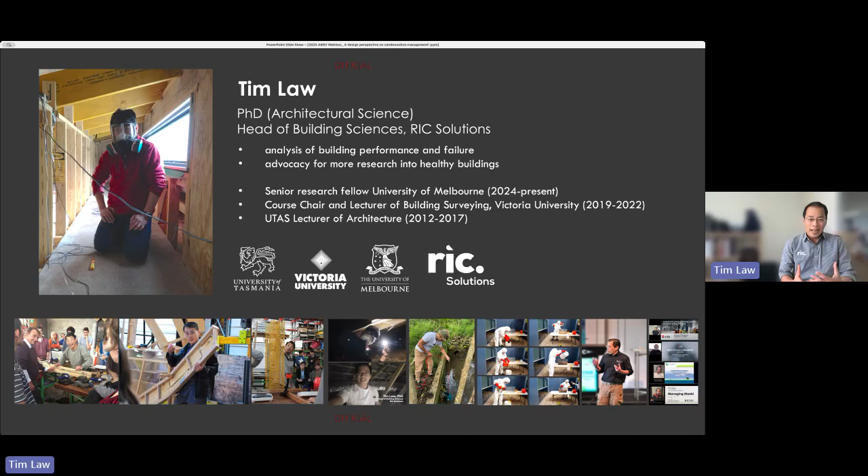A bit about myself. I'm an architectural scientist, and I will talk a bit more about what architectural science is. I did this at the University of Tasmania, and then I was the chair for building surveying at Victoria University. Currently, I'm working at RIC Solutions, but I also have an adjunct research position at the University of Melbourne. The photographs here just show you the kind of things that I like to do. I like to get my hands dirty. I think that is the side of architecture that I really love, because you've got to understand how buildings fail in order to make them high performance.

Very quickly, something about architectural science, in case you think I am making up a term that doesn't exist. This is a uniquely Australian term. It came from the time of Szokolay and Cowan, where they looked at the concept of using passive solar as a way of doing bioclimatic design. It involves many aspects. Currently, it is quite broad. It involves aspects of computing and parametric design and so forth. I'm not so much involved there. I'm still quite old school. I'm looking very much at building physics, but really extending that to the biology of microbes and occupants. This is where we publish, in a fairly high-ranked journal, the Architectural Science Review. Some of the articles are open access, but that is where you find the main outlet of our journal publication.

Now let's talk about architectural documentation, because this comes up ever so often. This came up recently in the ARBV webinar with Steve Bexus, the state building surveyor. He expresses his sadness that standards are diminishing, and he doesn't blame the architects. This is really an industry-wide problem. The issue is that poor design, and I think poor design means different things to different people. To an architect, a poor design is a design that's not well resolved. But to anyone outside the industry, poor design is anything that lacks design documentation. And that's what they're referring to, that the adequacy of design documentation has really been a subject of industry scrutiny, with findings suggesting that there's a link between poor design documentation and project variations, increased construction cost, and potential construction and non-compliance of building works. So it's not just non-compliant documentation, it's insufficient documentation.

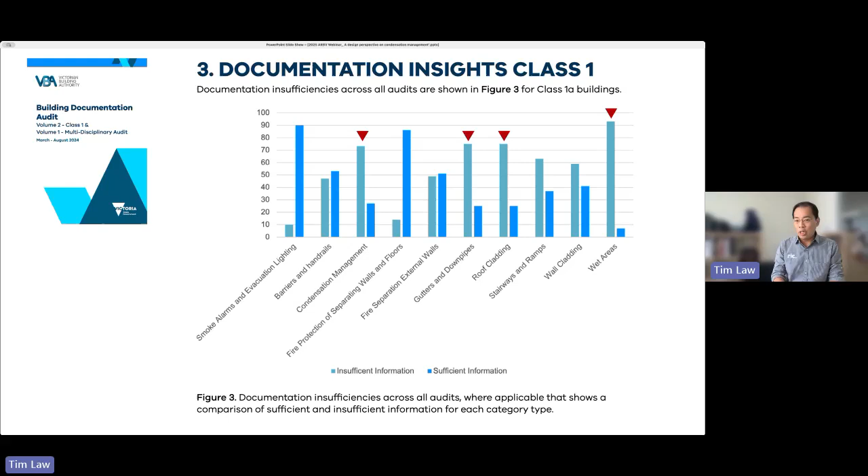The same audit was done again, looking at building surveyors' permit drawings and whether there was sufficient documentation, this time in class 1 buildings and some multidisciplinary audits. The light blues are those with insufficient information, and you find that those relating to moisture problems, of which condensation management is one, tend to be the ones that lack sufficient documentation.

In this report by the Architects Registration Board of Victoria and New South Wales, there was, in one of the appendices, a rather candid admission that under-documentation of standard essential details and design documentation may be a form of risk avoidance for architects. I think it could be the case because sometimes, say you do a bathroom and you say fall, but you're not sure.

Was it 1:80 or 1:100? It's 1:100 currently, but in NCC 2025, whenever that is implemented, it's going to be 1:80, and you're not so sure about that. There might be a way of saying, how about I don't put it down, just so that I won't be wrong about it. So that's what I think they mean by avoiding that risk, and adopting under-documentation as a mechanism for that.

To properly understand the whole scope of this, I thought I should give you a timeline of how all these condensation management provisions came to be.

It started in 2012 when I was at the University of Tasmania. A rather distraught builder came to us architectural scientists asking for help. He said the ceiling of his newly built house had just collapsed. When we looked at this straight away, we could tell it was a condensation problem.

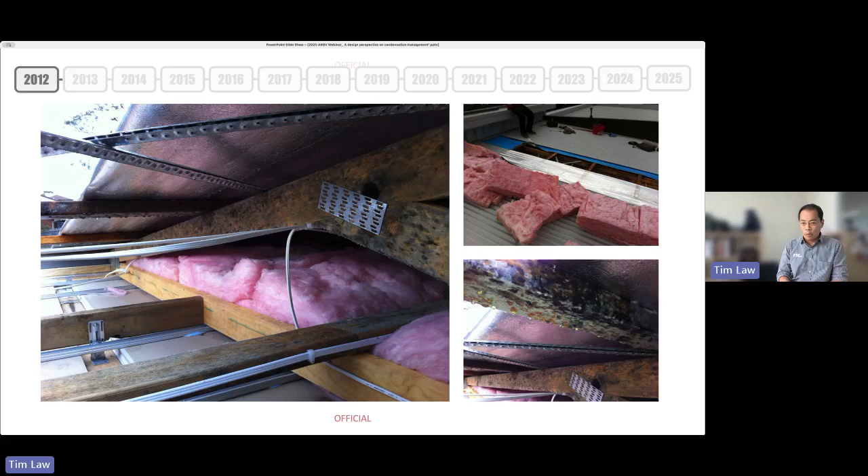It's been something we've been dealing with since we introduced 6 stars into the NCC, and we've noticed a lot of condensation problems, but this photograph was really quite graphic. We took it to the building regulator, who then set aside money for us to do research, on which we developed the Tasmanian Designer's Guide for Condensation in Buildings.

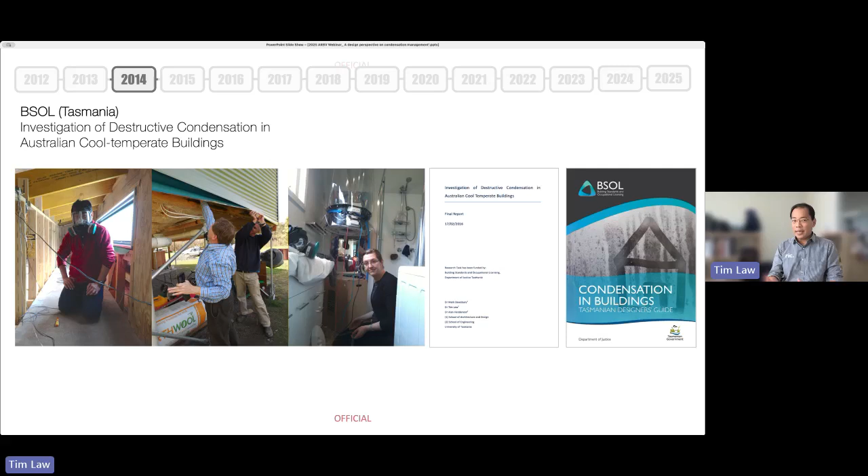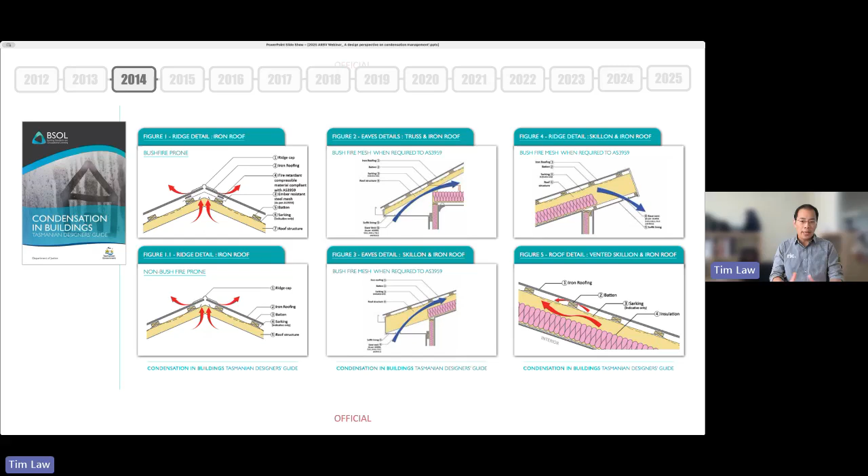This is what it looks like in that guide, basically looking at how we deal with introducing ventilation pathways into roofs and walls, especially in light of bushfire requirements like AS 3959.

Following up on this, it was to the Tasmanian Building Regulator's credit that they were banging on tables for a very long time, so that the ABCB finally funded a study. You might have been part of that survey.

We had about 2,000 respondents answering questions about what they estimated the frequency of condensation problems to be in brand new class 1 and class 2 buildings. You'll see climate zone 7 is quite overrepresented here because Tasmania was overrepresented in the survey responses. But across the board, regardless of climate zone or state, we found the general estimate was that 1 in 3 buildings had condensation problems.

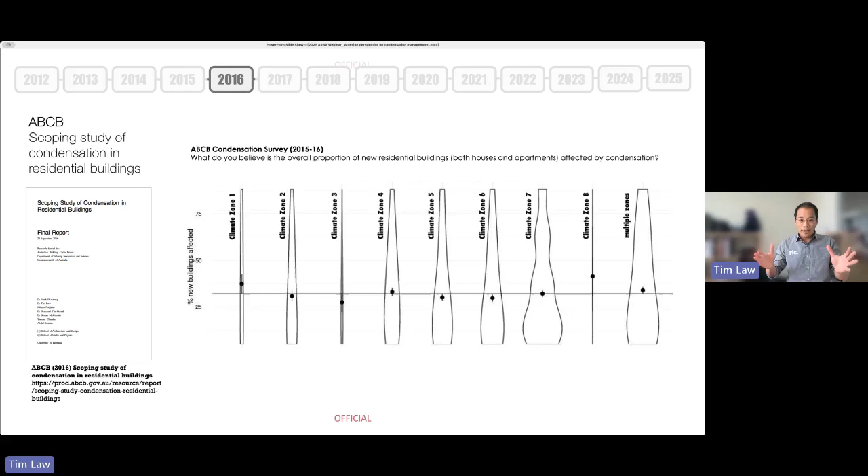That is just condensation. We're not even adding things like damp proofing, weatherproofing, and waterproofing, all the other things that create mold and other issues.

2018 was quite a big year, in that one of the federal members of Parliament, Lucy Wicks, was a champion because she suffered from mold illness. She pushed very hard for the health minister to look into this with more seriousness. So there was a federal parliamentary inquiry into biotoxin-related illness, or loosely spoken, mold illness.

There were a couple of recommendations, one of which applies to us already, asking for the adequacy of codes to be reviewed, whether we have proper prevention and remediation of dampness and mold in buildings. 2019 was a big year — finally, for the first time, we had condensation management provisions in the NCC.

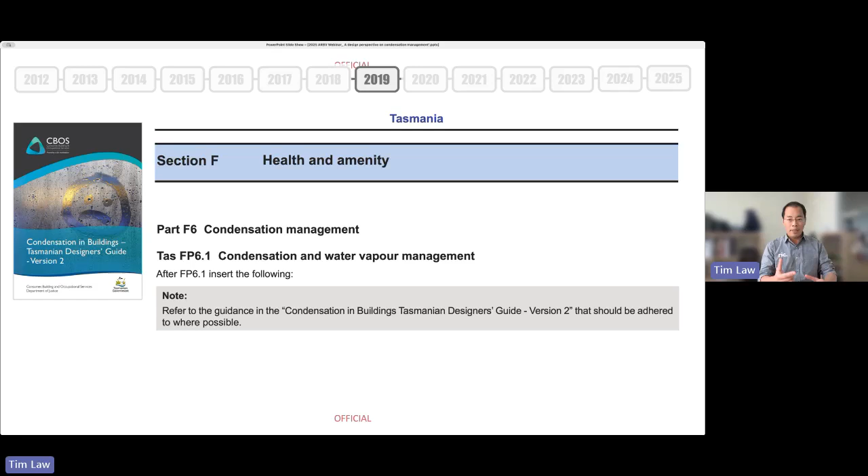In 2019 also, Tasmania had its own variation, its own DTS pathway, which referenced the designer's guide, in this case the updated version 2 of the one we did a few years before.

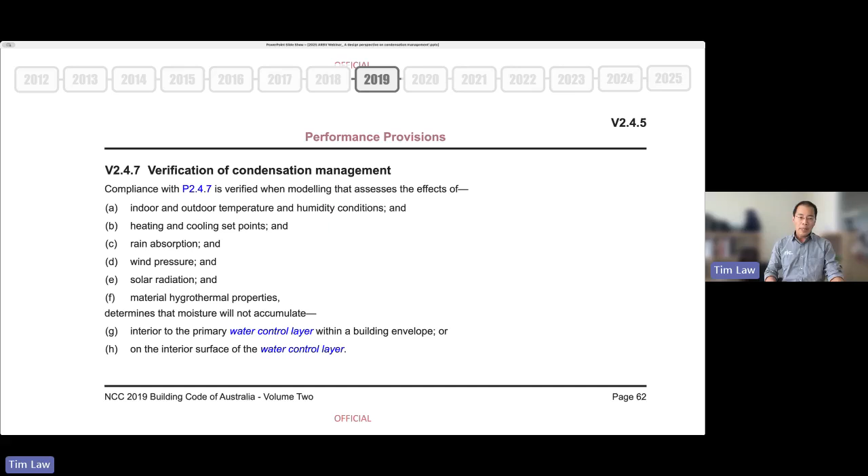2019 also introduced a verification method, which was quite broad in that if you looked at all those things, it could be an acceptable verification method to meet the performance requirements. I looked at those verification methods, and there wasn't something that worked natively with NatHERS files.

So I thought I would write a software code because I knew the science behind the building physics part, and I knew a little bit about programming to be able to put them together. So I started writing software for that. The idea was to take the engine—the engine in NatHERS is called the CHENATH engine—but replace the weather file with something more representative of a stress test, using real weather instead of a reference meteorological year file. Taking the temperature profile, putting a condensation analysis on top of that.

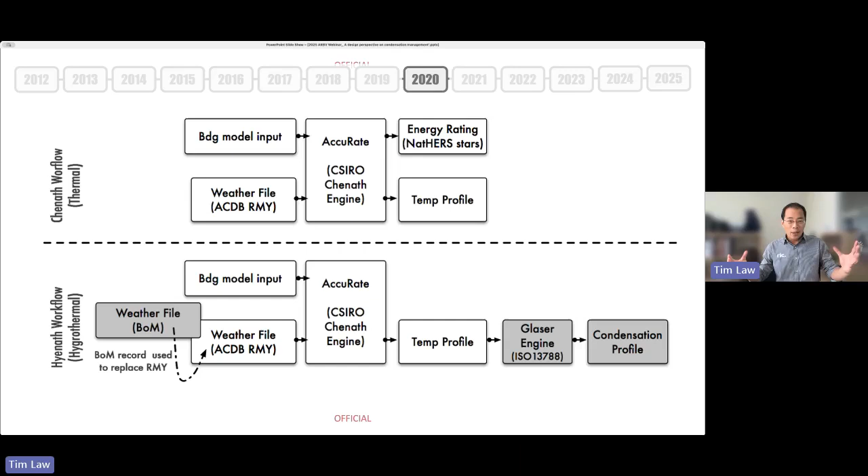And what I found in the process was that I'd created an engine with no inputs. We had no weather files and we had no material files. So all we had was an engine with no wheels, no chassis, nothing else. So I left it aside.

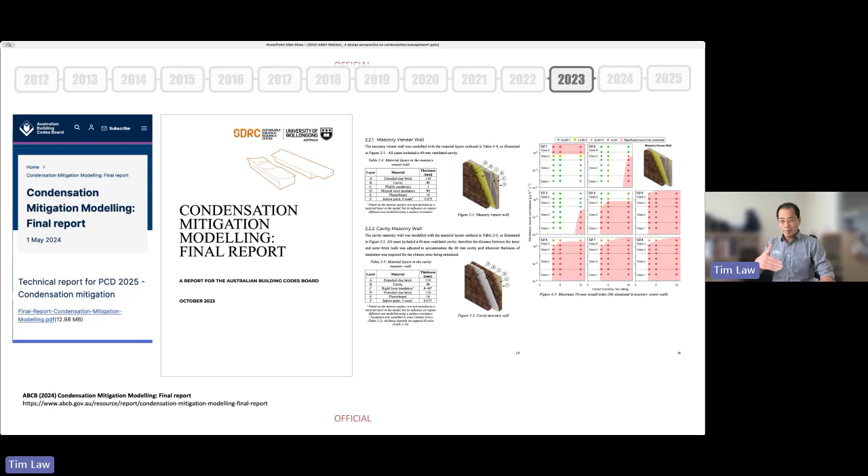I've been banging on at ABCB saying you can't keep changing the code based on simulations. We need real world data, because otherwise it's really a situation of garbage in, garbage out. You don't have the right inputs. We're taking weather files from who knows where, and material inputs from who knows where, and just changing the code based on that.

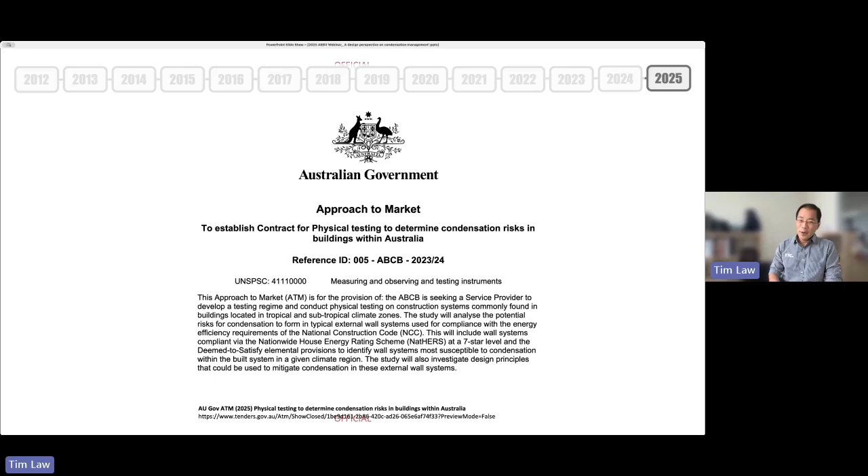So I think, just to shut me up, they've recently launched this approach to market to look at physical testing. This is the first time we are doing physical testing around condensation management, and I'm really stoked and looking forward to the results of that.

Now coming to the performance requirements—this we could talk about for an hour. It will surprise you, but this one little statement: risks associated with water vapor and condensation must be managed to minimize the impact on the health of occupants, can actually be the subject of an entire one hour presentation.

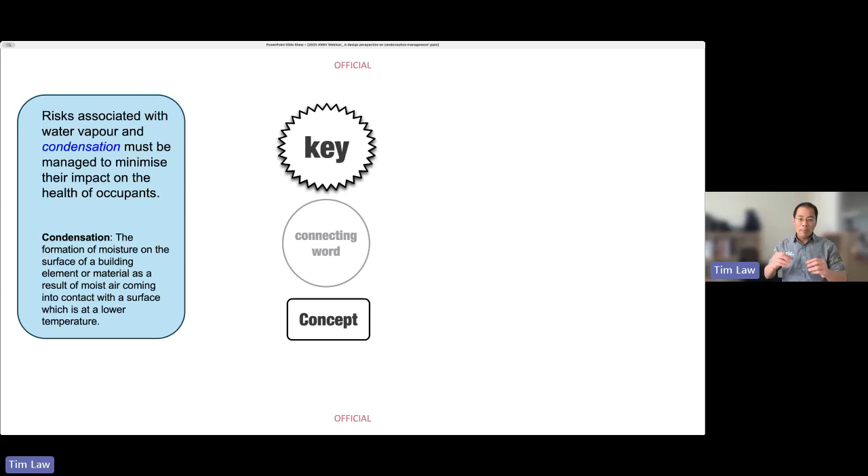Let me break it down a little bit. If we put this on the side, and being architects and visual thinkers, I'd like you to think about this as a conceptual map. We start with a central concept. We pick out the one key word in this entire statement to which everything else is connected as secondary concepts. So we have a central key concept and associated concepts, and these associations have to be made by a connecting word. Usually I'd pause for you to respond, but you can't, so I'll just proceed.

The key concept in my mind is risk. Risk from something, to something, for which something must be done. The risk is from water vapor or condensation. Now this is a big deal—for us we don't think so much about water vapor because condensation risk is quite imminent. But in subtropical and tropical climates, it's no longer just about condensation but dealing with high humidity, because water vapor is now the risk factor more so than condensation.

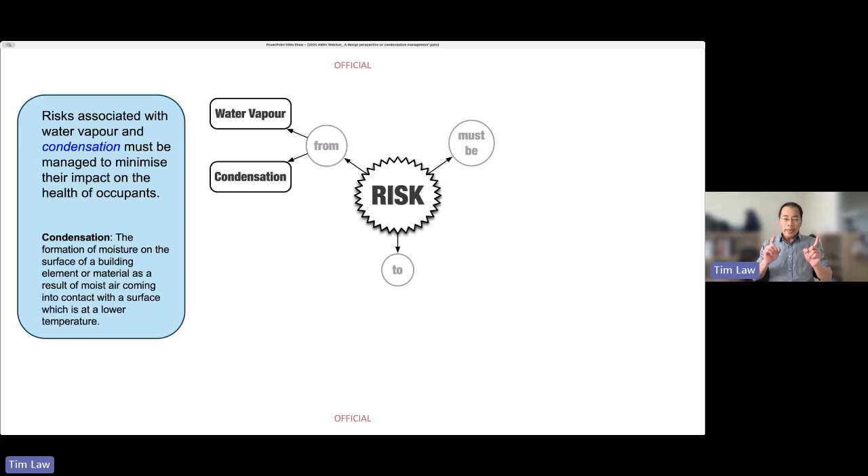So what is the risk from this to? Well, the risk is to the health of occupants. So what must be done to this risk? The risk must be managed to minimize the impact on the health of occupants. Now you see how this whole thing forms a conceptual map and a kind of loop.

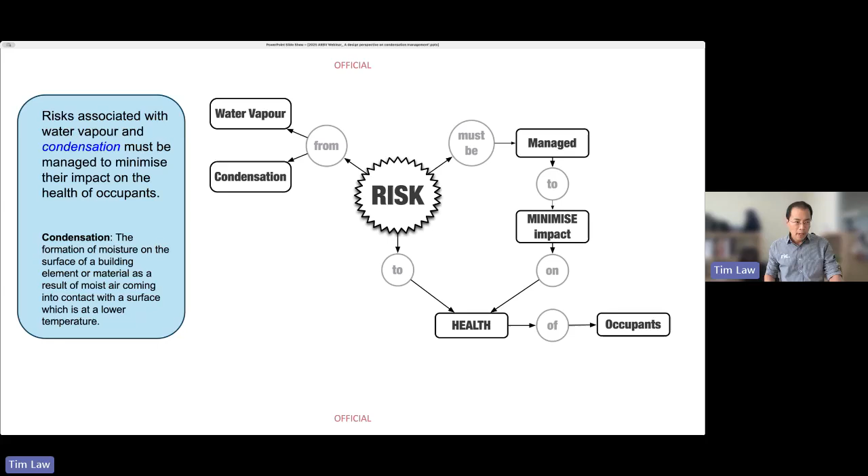Now, what does it mean to manage the risk? We have some guidance in the Guide to the NCC, from 2019, where the estimate is that every person gives off about 10 liters of vapor per person per day—that's cooking, breathing, showers, everything put together. If I manage that and brought it down to 5 liters per day, have I managed the risk of condensation? Theoretically, I have—I've reduced that risk by 50%. But have I minimized the risk to the impact on health? That's a different question.

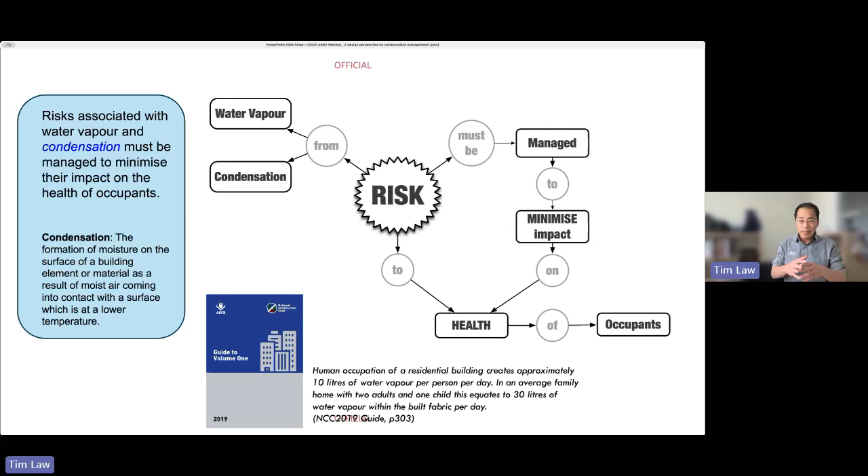10 liters of vapor per day would produce mold. 5 liters of vapor per day will also produce mold. So I haven't quite managed the risk to minimize the impact on health. Do you realize how broad this thing is, and how we are suddenly pushed away from our familiar domain of the built environment into something we are not so familiar with—and that is health.

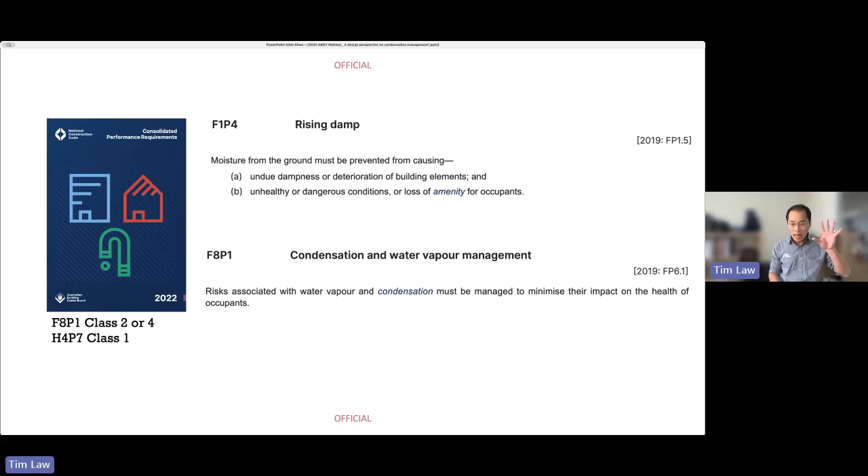We are looking now at biological systems. Let me put this in a way that we can compare.

Let's look at two performance requirements, one for rising damp and one for condensation management. We start off with the subject. One is looking at moisture, the other one is looking at vapor and condensation. One is looking at a requirement; one is prevented, the other one is managed. Straight off, you see they are very different. Prevention has got a very clear threshold. If moisture penetrates, you have not prevented it. Here we are looking at management, and management is not the same as prevention. I do a little bit to manage, I have managed it. The question is whether I have managed it sufficiently.

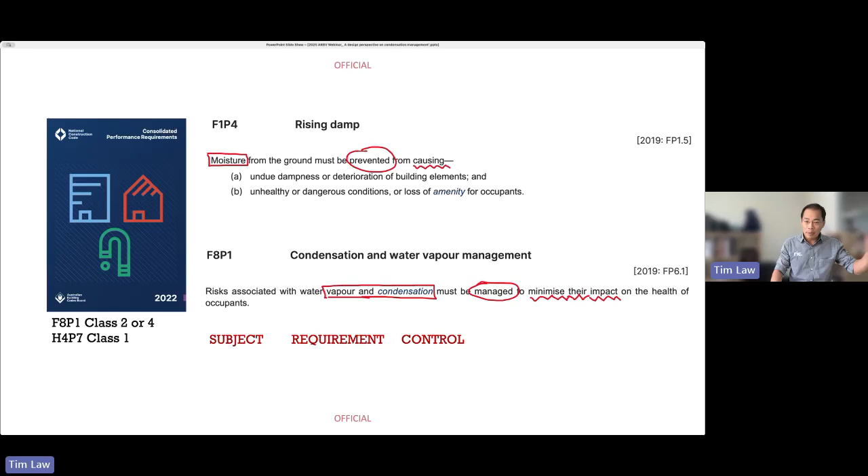Now we are looking at the controls. One is in terms of preventing something from causing something. The other one is to manage something to minimize the impact.

In terms of damp, we're looking at dampness, deterioration, unhealthy or dangerous conditions—we're looking at building elements or conditions. But condensation is looking at the health of occupants. So we're moving away from building elements and conditions, things that we used to be familiar with and could control, into something totally unfamiliar: the health of occupants.

And so this is where I think architectural science is so much more than building physics. It also involves understanding a bit of microbiology, to understand how mold germinates, grows and proliferates, and also how things like mold and other microbes like bacteria impact the health of occupants. So we're looking at microbiological and macrobiological systems—it's more than just physics, it's also biology.

Now, we can go on this for a long time, but in the interest of time I'm just going to drill down into a few things that I'm afraid sometimes we might miss. The first one is this thing called pliable building membranes. The term pliable building membrane is a defined term, but defined according to who?

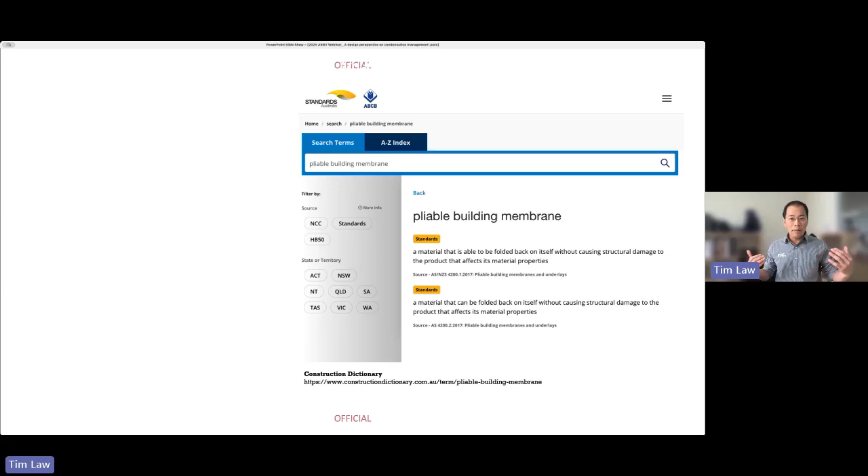Now this is a very useful resource—if you haven't used it yet, it's a construction dictionary, .com.au, that pulls out all definitions across the NCC standards and everything. So if you put in pliable building membrane, it comes up with a few answers. One of them is from AS4200, which talks about a material able to be folded back on itself without causing structural damage. That was how pretty much all of Australia understood pliable building membranes until NCC 2019 redefined that.

It redefined it as a water barrier as classed in AS4200 Part 1. So no longer is it just a membrane that can be folded back on itself, but a membrane classed as a water barrier. What is the class of a water barrier? It must pass the test specified in AS/NZS 4201 Part 4.

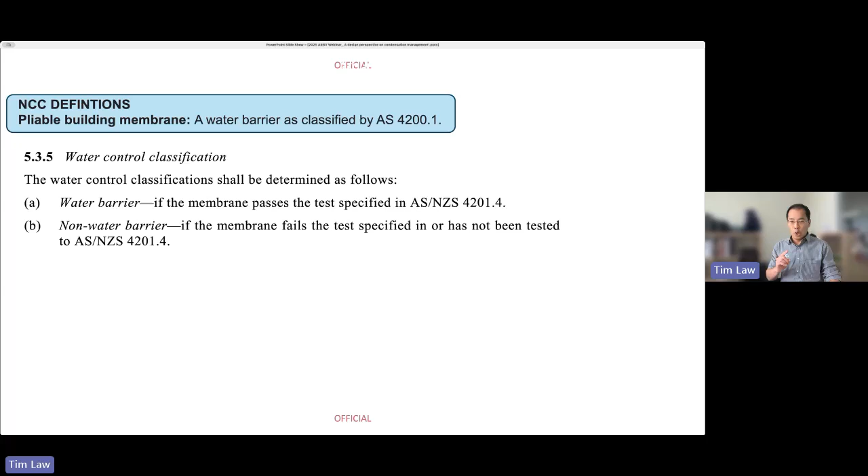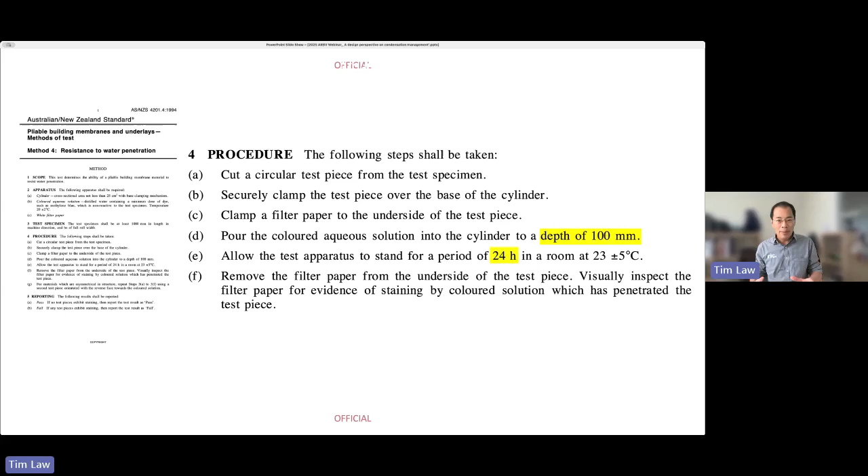If you take a look at this, the test is to hold a head of water 100 millimeters high for 24 hours. And it begins to beg the question: why do you need that in a wall that has got a drainage cavity? In what world would you need a membrane that can hold a column of water 100 millimeters high in a wall? Probably for a roof that might make sense, but for a wall, why?

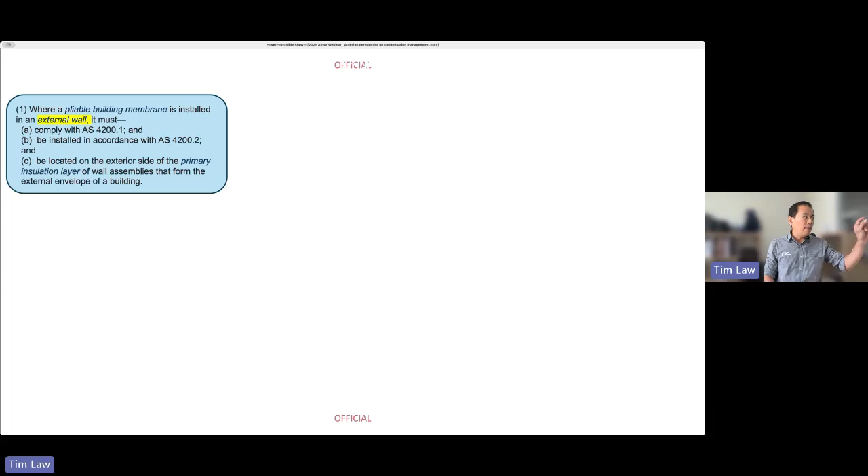But that aside, the NCC definition overrides the AS4200 definition. In NCC 2019, a pliable building membrane, if installed in an external wall, must comply with this. Now, what are possible membranes?

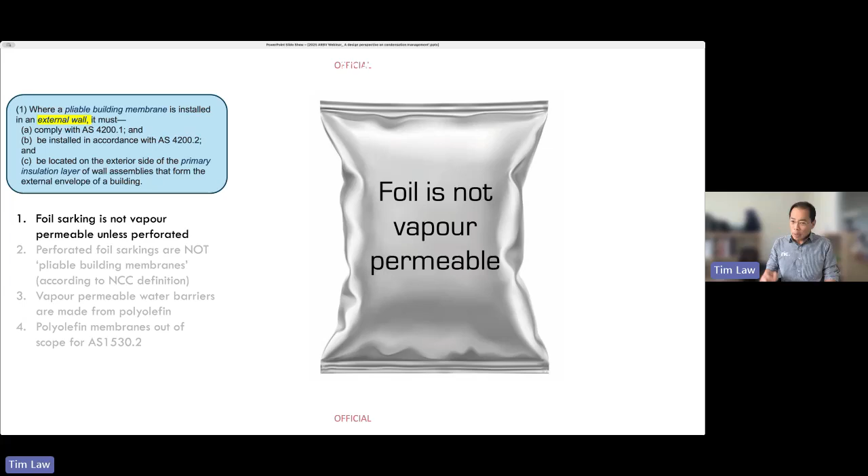One of them is foil, but foil in itself is not a vapor permeable membrane—that's why we use it to wrap chips, right? We package chips inside and it doesn't get soggy. But we can make it vapor permeable if you punch holes in it—a micro-perforated kind of foil. But this foil will no longer be a water barrier, and so foils are actually not pliable building membranes.

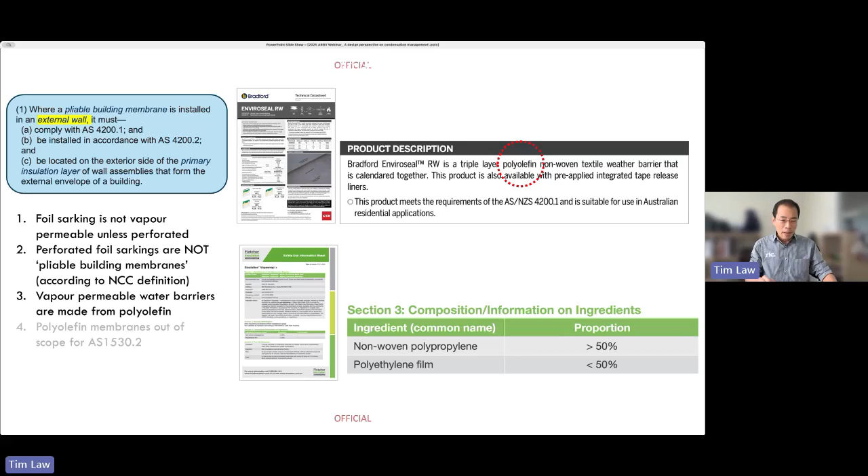Surprise, surprise—it's really bizarre, but this has created a different world for us. We are only allowed to use plastic membranes such as those made from polyolefin, polypropylene, or polyethylene. Well, they're actually all pretty much the same thing—polyolefin is a chemical category that includes polyolefin as well as polyethylene and polypropylene. But the important thing is that polyolefins are petrochemical products. They are flammable; they burn with a very hot and clean flame accompanied by melting and dripping, like a candle.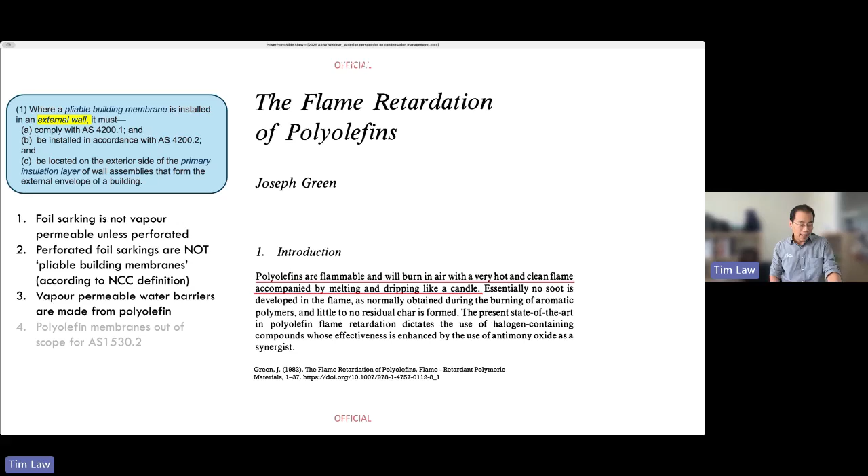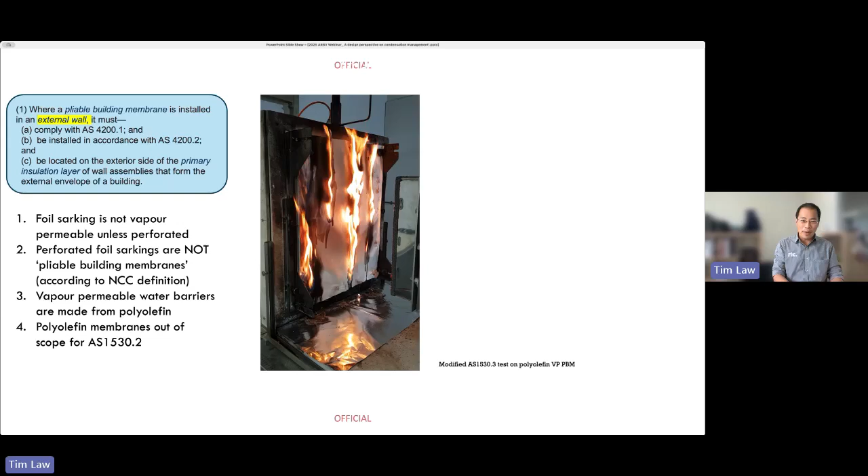You don't really need us to burn plastic for you to see that, but this was done for visual theatrics, to modify the AS1530 Part 3 test to show that these membranes are not suitable in a condition that has a flame.

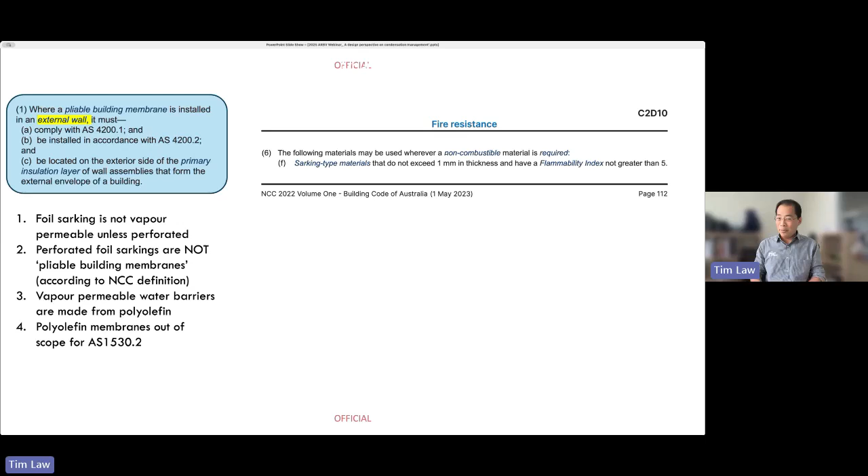But we are allowed to use these membranes under a special concession. The concession is that sarking-type materials that do not exceed 1 mm in thickness and have a flammability index not greater than 5. This is under the context of external walls, under the context of a concession for AS1530 Part 1 non-combustible. Non-combustible and flammable are actually different concepts.

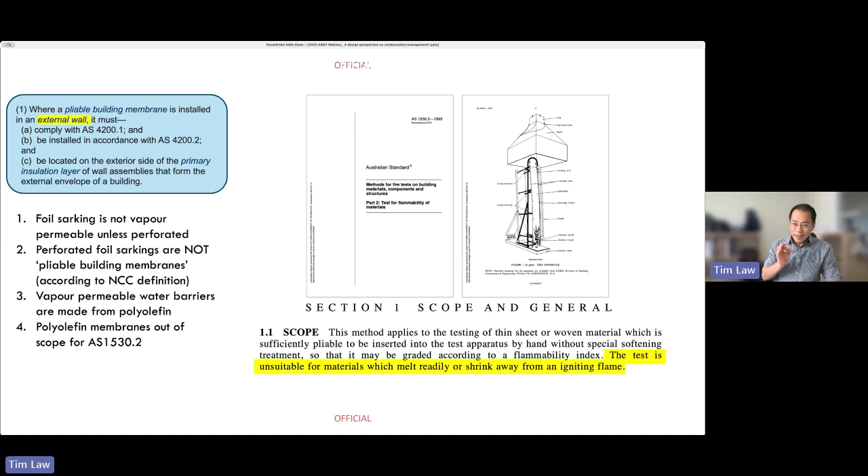What is this test like? This test is basically you clamp a membrane over a flame, you light the flame, you see how high up it goes. But in the scope, very importantly, it says the test is unsuitable for materials which melt readily or shrink away from an igniting flame, meaning you can't use this test on plastic membranes.

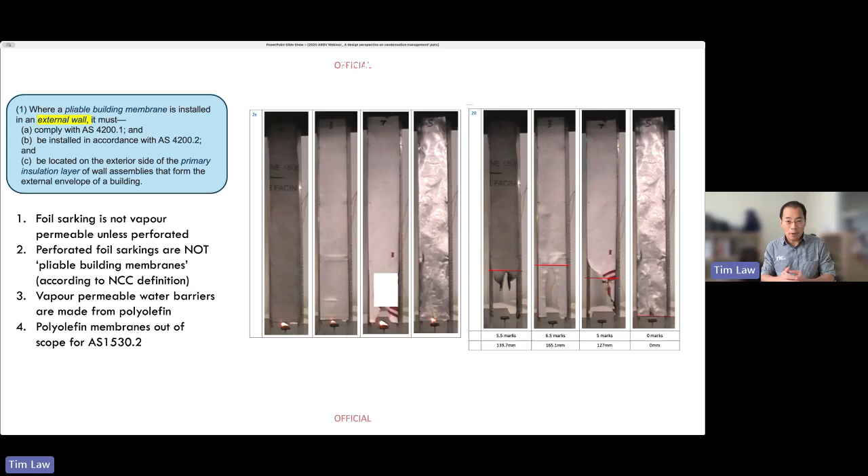What happens is that when you put this on a plastic membrane and the membrane melts before it catches fire, it doesn't catch fire. And because it doesn't catch fire, it appears to be non-flammable, not because it is non-flammable, but because it has melted away from the flame and is no longer touching it. So this is an example of what it looks like.

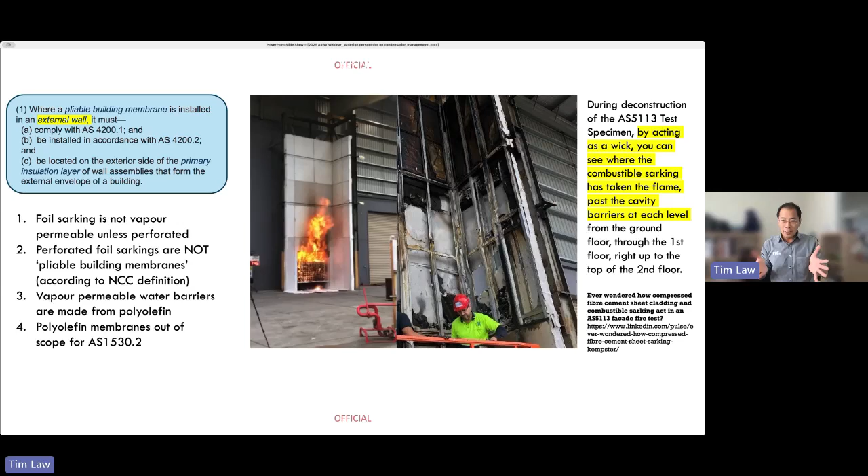So to think about it, we have been dealing with the issue of combustible cladding, but we have taken the plastic out of the combustible cladding and put that plastic into the membrane, unencapsulated inside a drainage cavity that can potentially catch fire and bypass all compartmentation.

I put some thought into this, and before the days of AI, this is as close as I can get to poetry. Let me read it to you.

To illustrate the difference between code and legislation, we turn to the then latest version of NCC 2019, with the newly introduced section Condensation Management. One requirement was that all buildings in climate zones 6, 7 and 8 have vapor permeable membranes. Vapor permeable sarkings are permitted where non-combustible building elements are required, if they do not exceed 1 mm in thickness and have a flammability index not greater than 5. The flammability test, AS1530 Part 2, is much less rigorous and only requires a flame source in unspecified room conditions, as opposed to a furnace setup in a fire testing facility for the non-combustibility test, AS1530 Part 1.

Furthermore, the applicability of this test is questionable for vapor permeable membranes, because the test is unsuitable for materials which melt readily or shrink away from an igniting flame. Now, what are these vapor permeable membranes made from? From the data sheets of main Australian manufacturers, they are listed as polypropylene and polyethylene, or polyolefin. Note that polyolefin is the chemical category which includes polymers such as polyethylene and polypropylene. Importantly, unless treated with chemical fire retardants, all polyolefins are combustible and burn with hot flames.

To summarize, by way of application, the NCC now requires that in places such as Melbourne, Climate Zone 6, the walls must be wrapped with vapor permeable membranes. That is, sarking exempt from a non-combustibility test and adopting a flammability test method ill-suited to plastics, made from the same material found in the combustible cladding that the Victorian government is spending $600 million to replace. Simply put, should vapor permeable membranes be installed in walls that were intended to be non-combustible, in terms of NCC compliance? Yes. In terms of public safety? No.

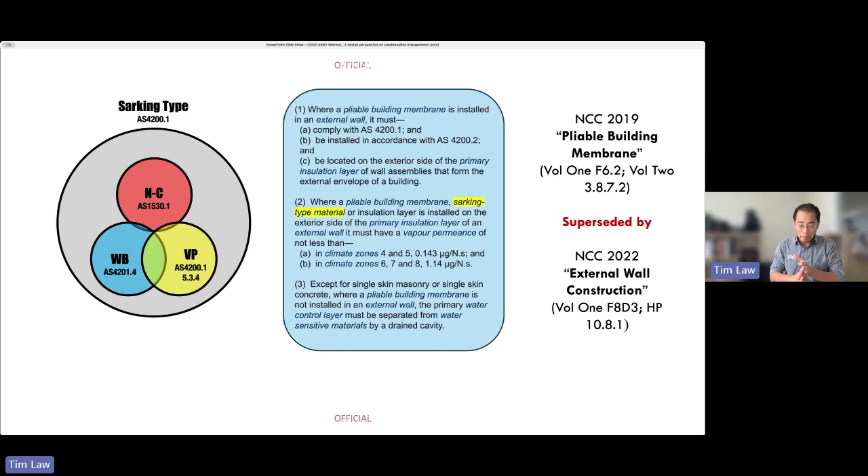So basically, we have these three conditions: it's got to be non-combustible, a water barrier, and vapor permeable. When I published, I couldn't find a product with all three. I believe there is now one product that has all three, but I won't tell you which one it is.

Now, the other thing that I think might be of interest to you is the verification method, because quite often you might find that your creativity might go beyond what the DTS pathway allows you to do. I'm just going to forewarn you that the verification method is actually harder than it seems.

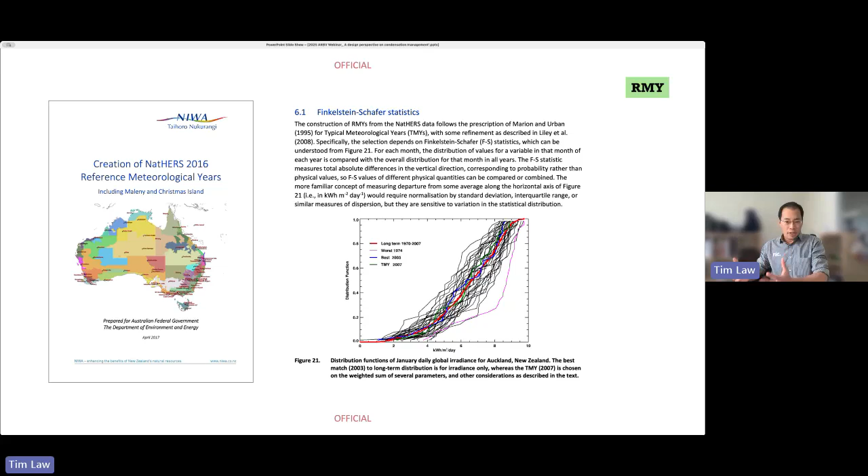To understand this, we've got to understand climate files. I'll start with what we are most familiar with, the NatHERS files, called the RMY, or Reference Meteorological Years. With an RMY, you look at your past history of record and work out this thing called the Finkelstein-Schaefer statistic. Basically, you're trying to find the most middle-of-the-road January in your record, and you stitch that with the most middle-of-the-road February, average March, average April, and so forth, stitching it all into one year, and that becomes your RMY.

We can take RMY and add in the precipitation, because energy files didn't need rain. To comply with the DA7 approach, you have to have rain inside there. So what UTAS did was basically a bridging approach to introduce rain data. Let's say it was January 1995, I look up the weather station, pull up the rainfall, and now we have an RMY plus precipitation, which is currently what we have in WUFI 7, just given to us this year. Before this year, WUFI did not have any Australian climate files.

Every hygrothermal simulator had to create their own files.

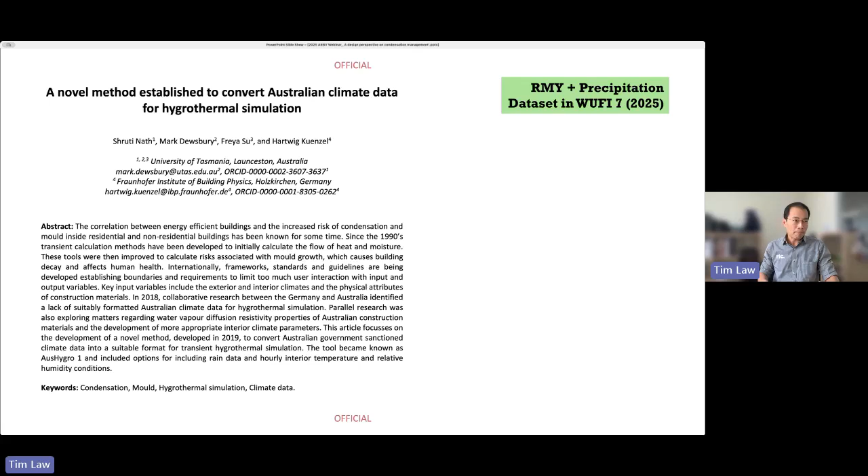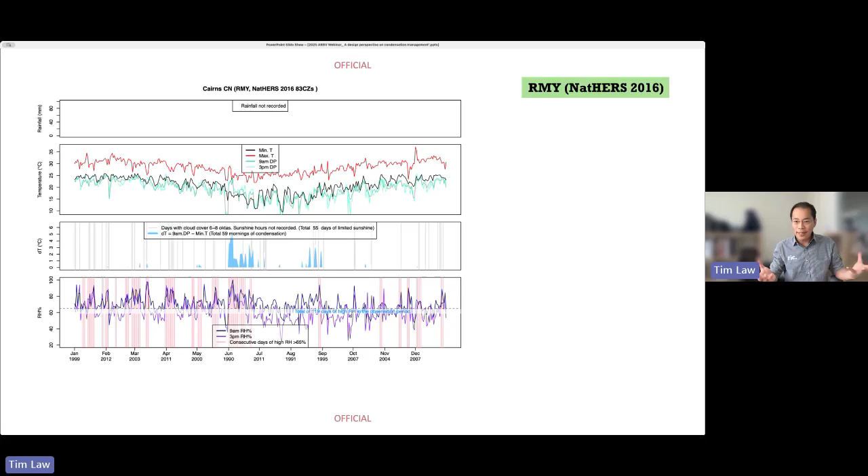What happens is, if you look at RMY—in this case I'm pulling out a case from one of my projects, looking at Cairns—the blue spikes show you where the minimum temperature goes below dew point, so that's a condensation risk. The pink lines show where we have a continuous period of high humidity of more than 48 hours. Two pink lines indicate two days of that threshold being breached for 48 hours. So looking at the blue and pink lines, you get a feel for roughly the kind of risks we're looking at based on RMY.

Now, if I were to put in real data from BOM, you'll find that the blue peaks are a lot more frequent and a lot higher. The pink lines are a lot denser and spread across the year.

The thing is, RMY, being the average of averages, is not suitable for a hygrothermal stress test. It is suitable for an energy test, because you don't want a year that's too hot or too cold—you want middle of the line to estimate what kind of energy you use. If you get that wrong, what's the big deal? You just pay more bills. But if we get our hygrothermal simulation wrong, we get mould, we create a health risk, and that health risk makes the building uninhabitable—we fail in our task of providing proper dwelling for people.

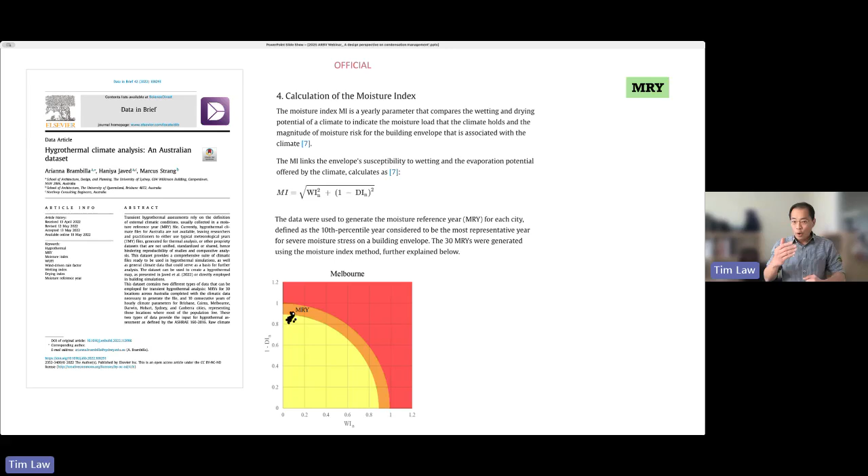So we need a very different criteria for hygrothermal analysis. We find the best practice is to use this thing called MRY—the Moisture Reference Year. It's based on looking at 30 years of data. Each year we work out a moisture index, which is your wetting index less your drying index. We put it up, and then we sort them 1 to 30, 1 being the worst year, 30 being the least bad year, and we pick number 3—that is the top 10th percentile. So not the worst of a cyclone year, but a reasonably bad situation. We use that as a simulation for doing the mould index calculation.

The University of Sydney has been fantastic—they have made this publicly available for 30 of the most common towns across Australia.

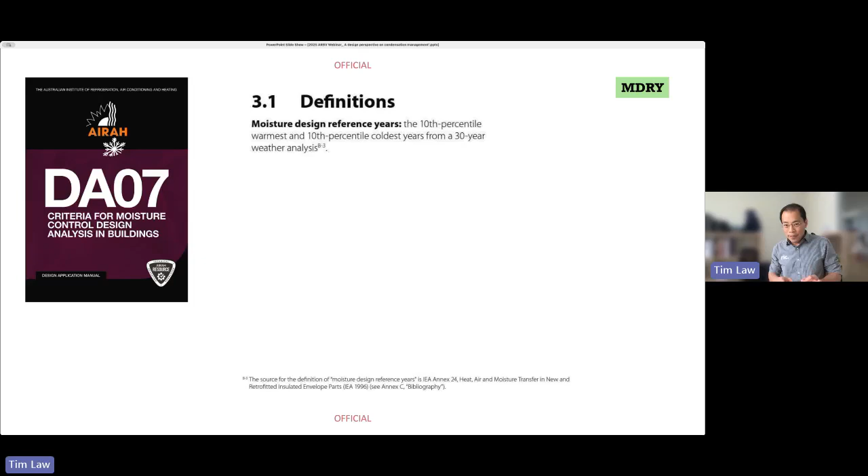There is yet another year, called the MDRY, Moisture Design Reference Year. It is not quite an MRY—we are using, once again, a 10th percentile, but it's not based on a moisture index. It is based on the 10th percentile warmest and 10th percentile coldest year. Now, before you tell me to look up the reference, I did, and the reference doesn't say anything about how to do this method. So I summarize it here.

DA07's MDRY definition based on temperature lacks a viable path for practical implementation. We don't know how to create the warmest or coldest year. Are you looking at average, maximum, minimum? Is it aggregated daily, monthly, annually? Are we having heating or cooling degree days? Is it seasonal weighted? We have no method. Then we cannot actually produce what is this MDRY.

And even if MDRY could be operationalized, why are you looking at the warmest and coldest without any humidity and rain data? Why are we using that as our criteria? In fact, ASHRAE, which also produced ASHRAE 160, on which DA07 was based, have themselves abandoned this method. Currently, the gold standard is MRY, not MDRY. And if we use what we have currently built in, that is NatHERS RMY plus precipitation, those are average years. They are not the 10th percentiles. So we have created a definition that cannot be complied with.

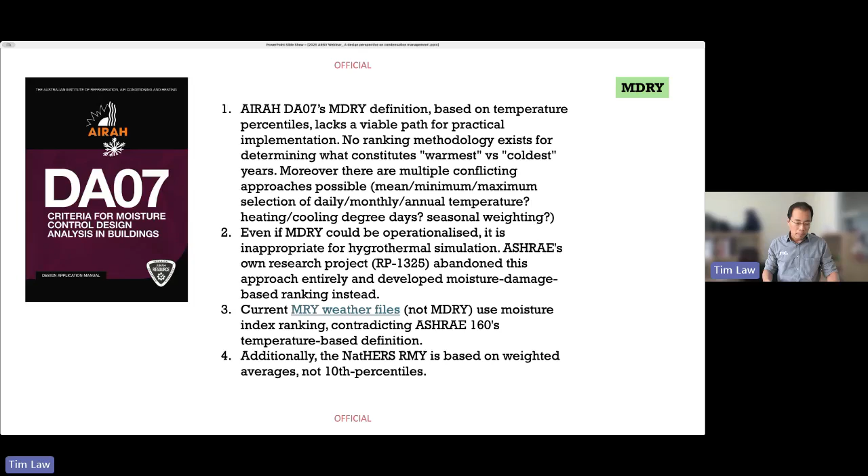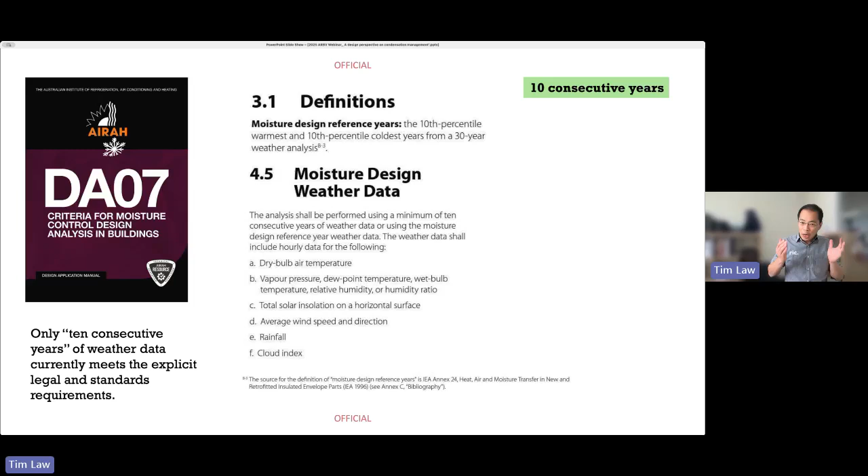And we only have 2 ways of compliance with the weather input. The analysis shall be performed using a minimum of 10 consecutive years of weather data, or using the moisture design reference year weather data. So I went down this track, and it felt like I went down a rabbit hole on a wild goose chase looking for a unicorn. Did I just put 3 animals together? But basically, I found that I had to try so hard in order to find that I couldn't comply even if I wanted. The only way to comply is 10 consecutive years.

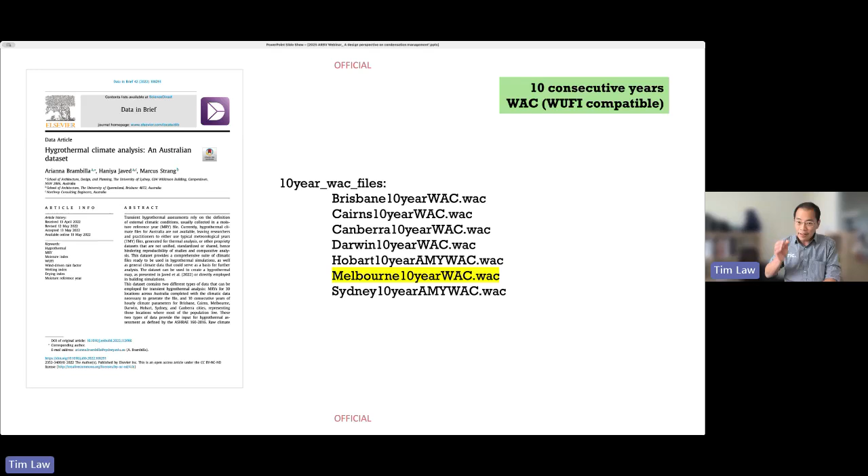Thank God, University of Sydney also gives us that, but this is a much smaller data set, only a few capital cities. You have that for Melbourne and nowhere else. So if you're outside of Melbourne or in a climate that is significantly different, you're on your own. You've got to look for a 10-year weather file somewhere, somehow, with precipitation data in order for you to have a DA07 compliant VM pathway.

Now, in the time we have, I've talked so quickly, I can actually talk more slowly from now onwards. Let's talk more slowly about this. Because I think this is an important and complex matter, the architect's duty of care.

Let us start from this. If you're not already aware, the rental minimum standards have been stepped up since 2021. Each room in the rented premises must be free from mold and damp caused by or related to the building structure. So if a person is in a rental premises and they find mold, the first question they've got to ask is, is this caused by the building structure? Is it related to that? If it is, it's an urgent repair. And until that is fixed, the tenant can even make the case that it is unfit for habitation because it doesn't meet the rental minimum standard.

Now, this is big because that becomes part of your problem. If the client said, this is an investment property, I'm building with the purpose of renting, what if you create mold as a result of a condensation mismanagement? You see how the rental regulations have gone way past where the NCC is. They're looking at real-world outcomes while we are still talking about hygrothermal simulations. And we found that the insurers have wised up to this also. They have already started putting mold exclusions on top of combustible cladding exclusions.

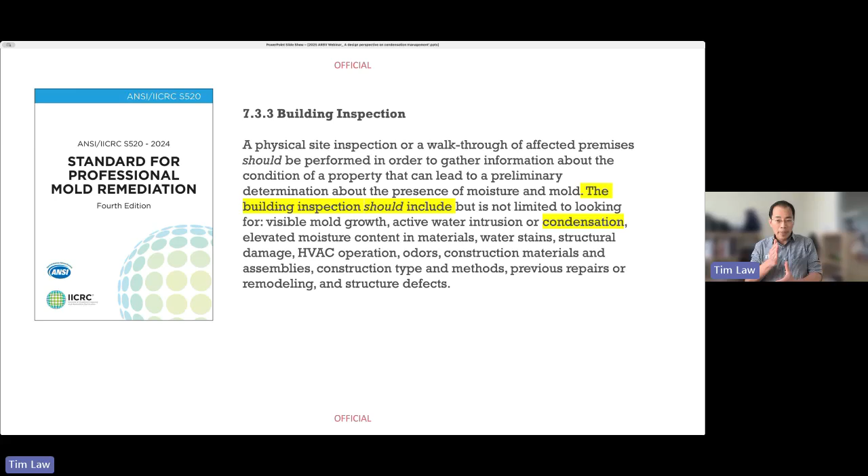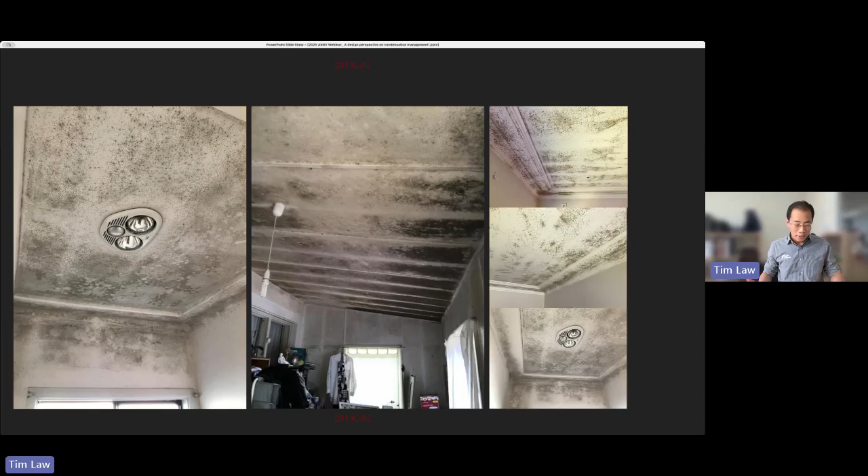This you can tell is a condensation issue because it's coming top down from the roof. You can see the lines that mark up either the trusses or the battens. So we can tell that this is top down, this is condensation related. Plasterboard, really not a good material where condensation risks are high.

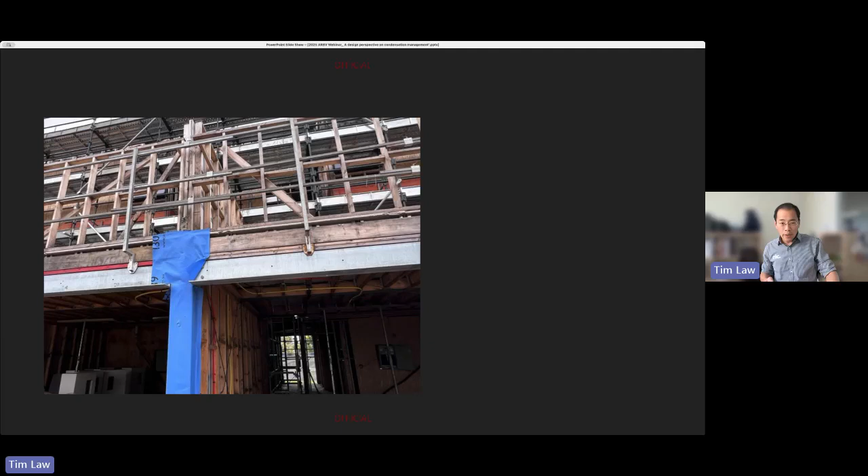Now, this one is a really big problem. Fire compartmentation, those fire-rated walls. The nature of these fire-rated walls is that they have got to be built together with the walls, which creates two problems. One is that it is not roofed over during the construction process. And the second is that if you were to pick certain materials such as shaft liner, because of the way it slots into the edge joists, these materials cannot be replaced. So we are stuck with a situation where these things are prone to exposure to the weather. And once they are moldy, we actually have no way of replacing them as the ANSI/IICRC S520 require. So we are stuck in this regulatory no man's land.

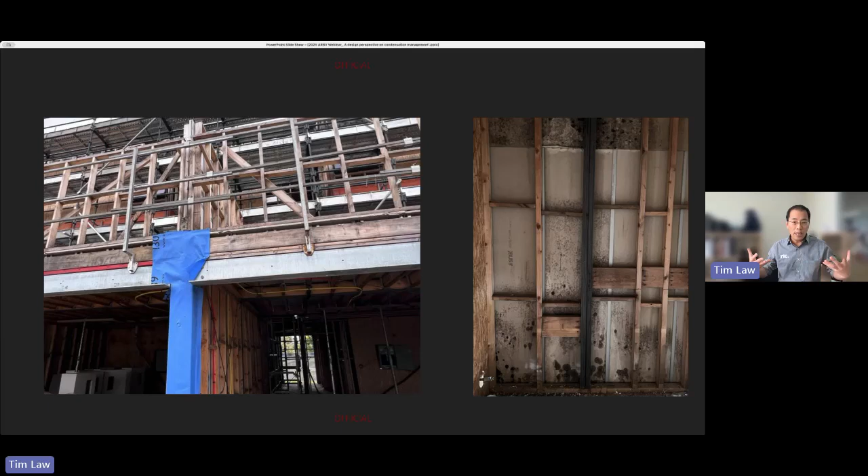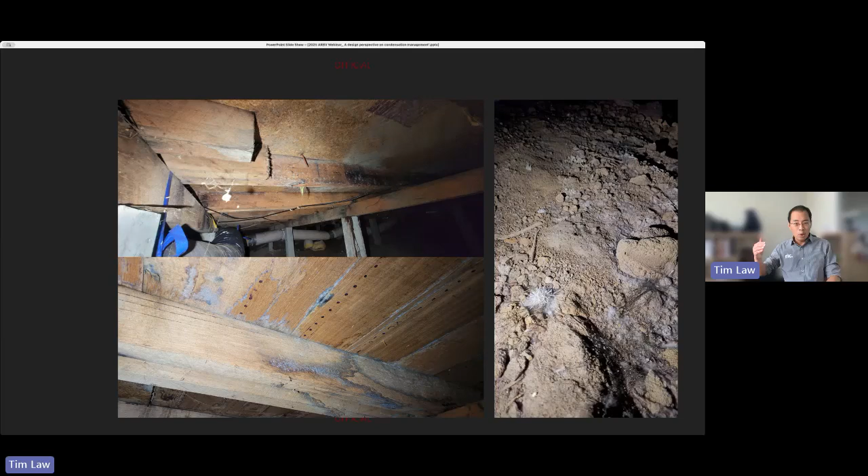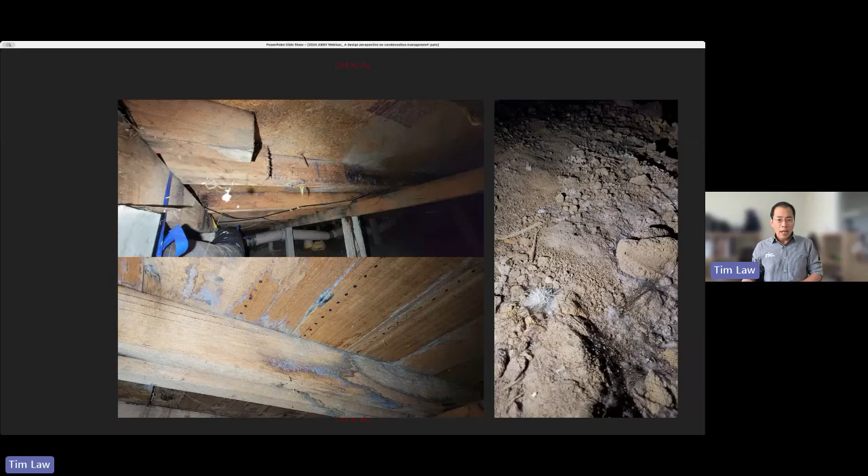This is an example of basically a subfloor that is way too wet. You can see mushrooms and other fungi growing there. This happens when you've got a sloped site. It doesn't matter which way the slope is going, one of the walls is going to be an external wall to an uphill slope. There should have been a cutoff drain so that the water doesn't accumulate in the subfloor, and that is a design decision. There should have been a cutoff drain, and there wasn't in this case. Quite often you end up putting planters on the outside, and as the owner puts more and more mulch on those planters, eventually they block those ventilation holes, and that's what happened here.

You notice that there's some mold growing on the Tas oak, but it is way, way more significant on the yellow tongue particle board flooring. The particle board flooring was never intended for a place that was constantly exposed to high moisture. Once again, particle board is mold food that is pre-digested, so we are creating the nutrients for the mold to grow.

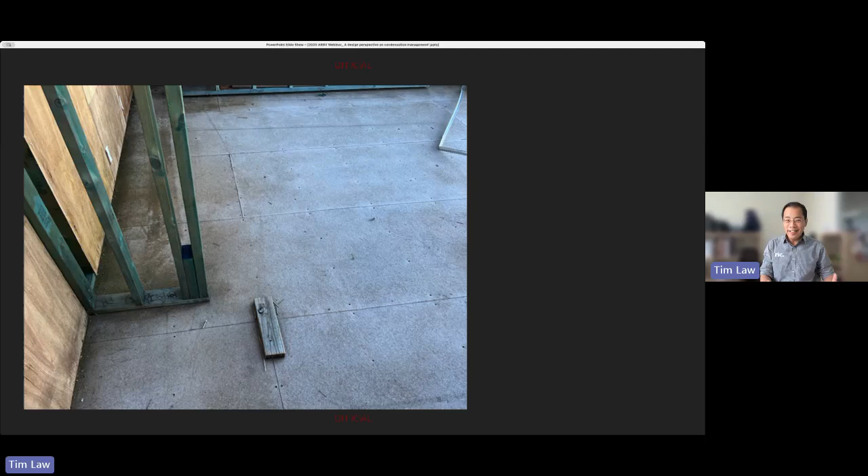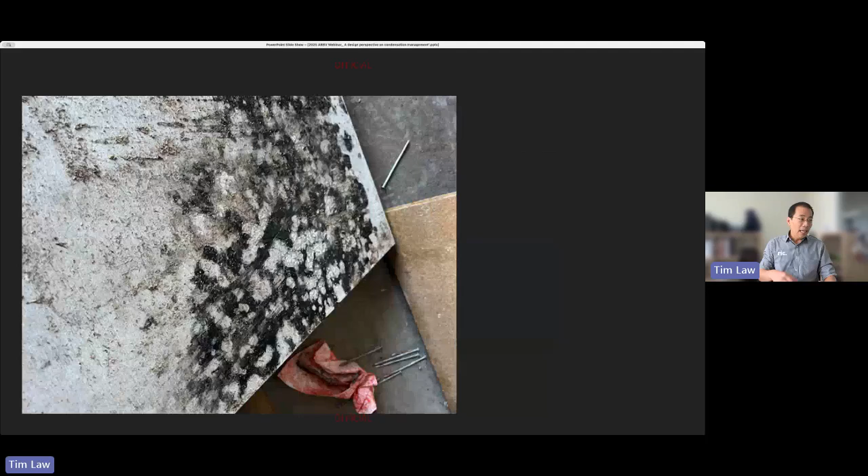This is fiber cement sheeting flooring, FC sheet flooring. What is the fiber in fiber cement? It once upon a time was asbestos. When asbestos was outlawed, we replaced that with cellulose fibers. There's actually more cellulose in 1 square meter of FC sheet than there is in 1 square meter of plasterboard. So if you leave this constantly in a damp environment, the underside became so wet that mold started to grow on FC sheet. It even grows on unused FC sheet that was left in the weather for too long.

Coming back to the Act, we would think that the Act protects the health of people, especially when that is the first stated objective of the Act. We find the only implementation of this in section 106, where the RBS has the prerogative to exercise the opinion. My opinion doesn't matter; the RBS is the only one entitled to the opinion if the building is a danger to the health of any member of the public. Now, I was the course chair for the only place in Victoria where you could get the prerequisite qualification for an unlimited building surveyor, and I know our curriculum doesn't cover the health consequences of building permits. So this is a no man's land.

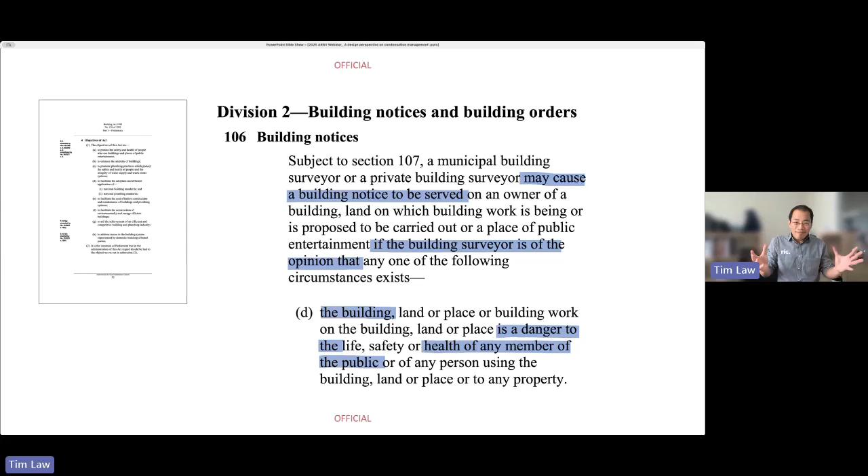I don't think many RBSs are comfortable working out a determination or expressing even an opinion that the building is a danger to the health of somebody. So basically, this section never gets exercised.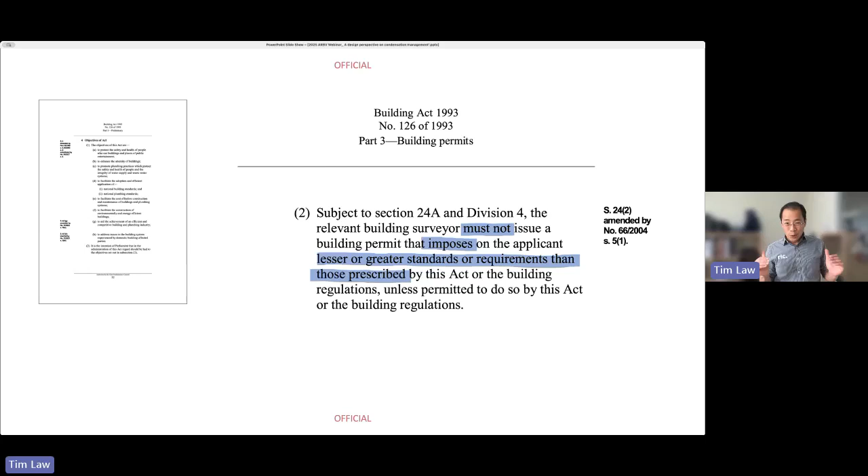They will also claim that under Section 24, the RBS must not impose lesser or greater standards than those prescribed by the Act. So to them, the building surveyor's duty of care is to ensure compliance. But what is the architect's duty of care?

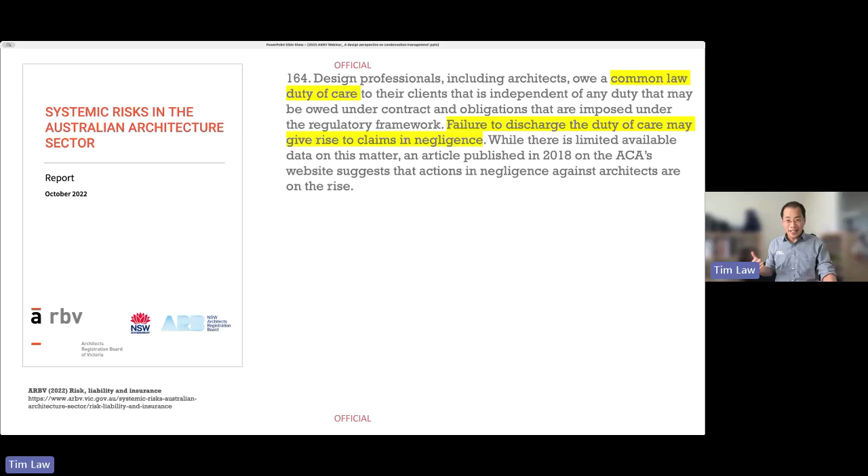There is a common law duty of care. And what is the flip side of that? A failure to discharge it is deemed negligence, and you become open to complaints or lawsuits. Now, these services are very broad.

Let me give you an example. What is a wet area? It is bathrooms and laundries. Is a kitchen a wet area? Not in the NCC. So the RBS cannot insist that you turn the kitchen into a wet area. But the architect, if so inclined, can exceed those requirements based on a duty of care to cause no harm. This is what it is.

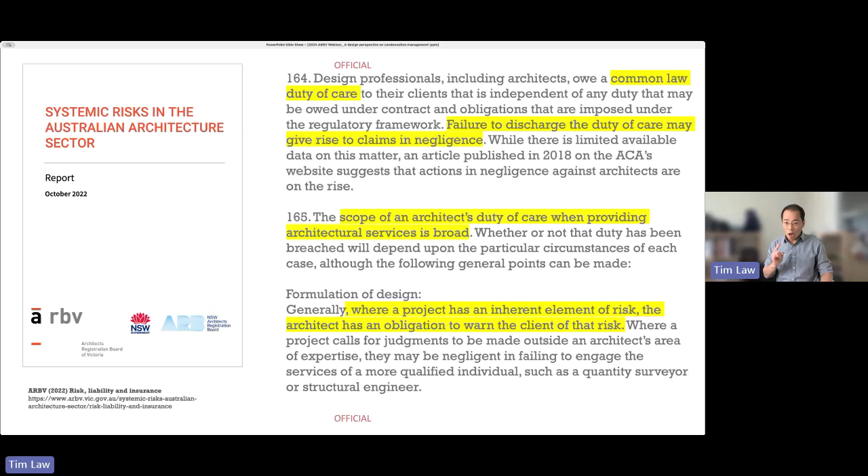When a project has an inherent element of risk, the architect has an obligation to at least warn the client of that risk, and it goes on—not just to the client, but any third party that relies on that documentation. One of the biggest complaints received by ARBV includes cases where they do not have the skills or experience to know whether or when to engage other specialists.

So here are some other resources I'd like to recommend. The VBA, now BPC, publishes this regulatory priority. You'll find that water is now even a high priority compared to fire safety—I think they've dealt with fire safety for a bit and are now turning their attention to water.

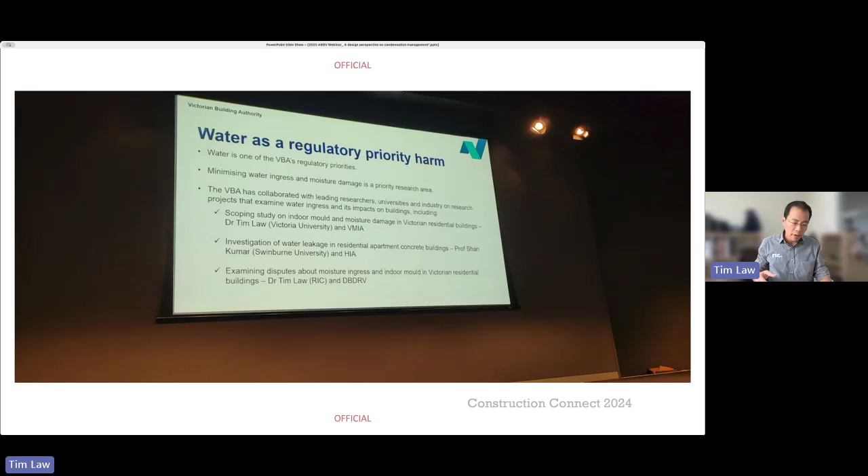In the area of water, I was surprised I was mentioned a couple of times, because I feel this should be a much wider case with more research done. But the two publications mentioned here are these two: one is a scoping study on the nature and extent of moisture damage in houses and apartments in Victoria, done when I was at VU, and the other done when I was at RIC Solutions currently, on moisture-related building disputes.

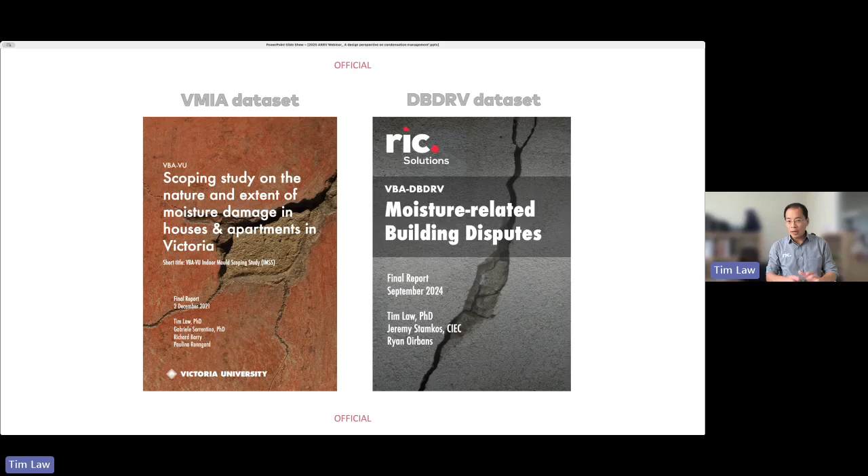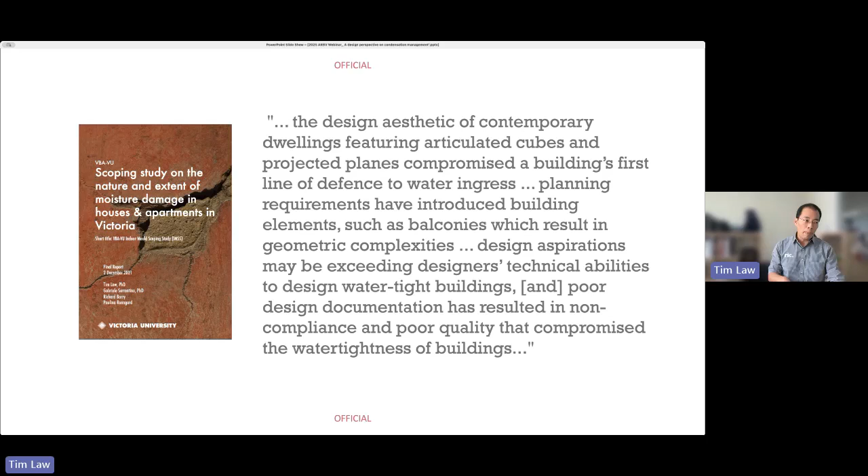If I'm just going to pick up a one-paragraph summary—and I'm not going to make any friends after this—for this report I said the design aesthetic of contemporary dwellings, featuring articulated cubes and projected planes, compromises a building's first line of defense to water ingress, that is, its ability to deflect water in a traditional design. Planning requirements have introduced building elements such as balconies, which result in geometric complexities. Design aspirations may be exceeding the designer's technical abilities to design watertight buildings, and poor design documentation has resulted in non-compliance and poor quality that compromised the watertightness of buildings.

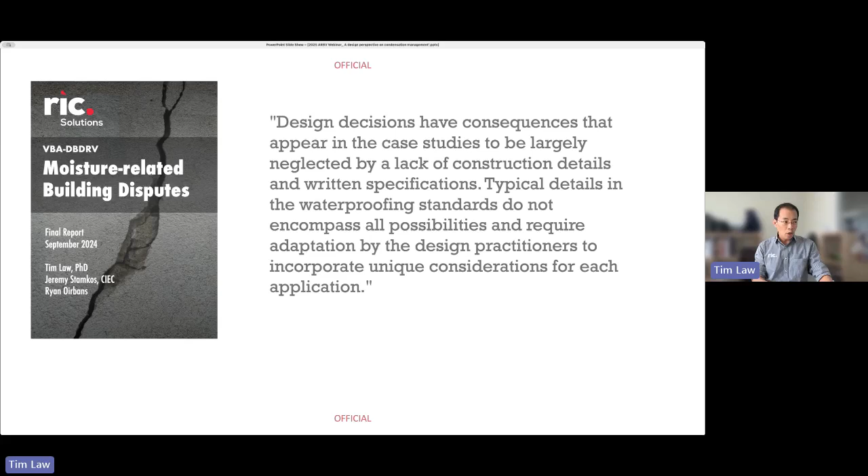In the next report I said design decisions have consequences that, in the case studies, appear to be largely neglected due to a lack of construction details and written specifications. Typical details in the waterproofing standards do not encompass all possibilities and require adaptation by design practitioners to incorporate unique considerations for each application.

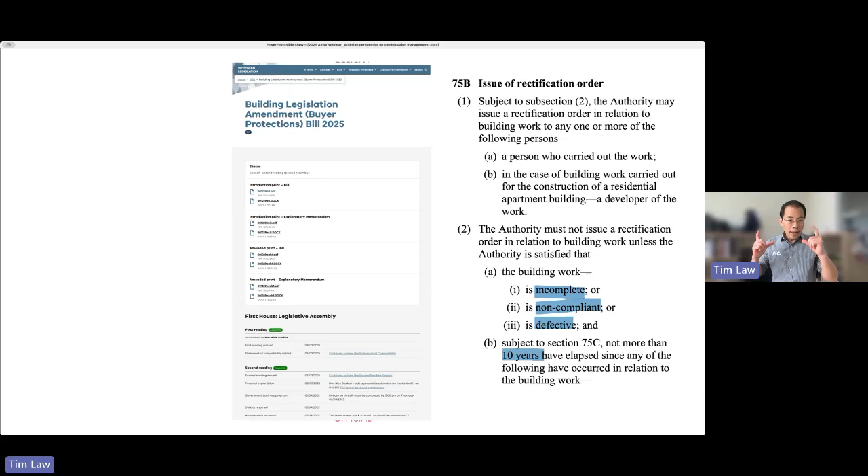You might be aware that quite recently we had a big discussion about the Buyer Protections Bill, now passed into law. This gives the BPC the ability to issue rectification orders as one of its key instruments, in relation to building work that is incomplete, non-compliant, or defective for up to 10 years. The term defective is pretty broad, and it doesn't just encompass the workmanship of the work but can also be attributable to defective design—that's where we come in.

Where this has caused the building to be uninhabitable, it points back to the rental minimum standards—if there's mold, it is not fit to be rented out. That gives any complainant a very strong case to say that even if it's not for rental, if there is mold, the building is uninhabitable and unable to be used for its intended purpose.

I tried to respond to this, and to put a long story short, it is well intended but poorly executed. The long version is in this book. I wanted to show where the loopholes were, so I created a form of Trojan horse advocacy and wrote this book called The Defect Evasion Playbook. I'm basically channeling the voice of a disreputable old builder teaching a young builder how to find loopholes in the law.

So it'll be something like that. Should some impudent owner, emboldened by a TikTok video or a neighbor's tale, dare to utter the words defective or not in a workmanlike manner, you must treat this as a personal affront to your very throne.

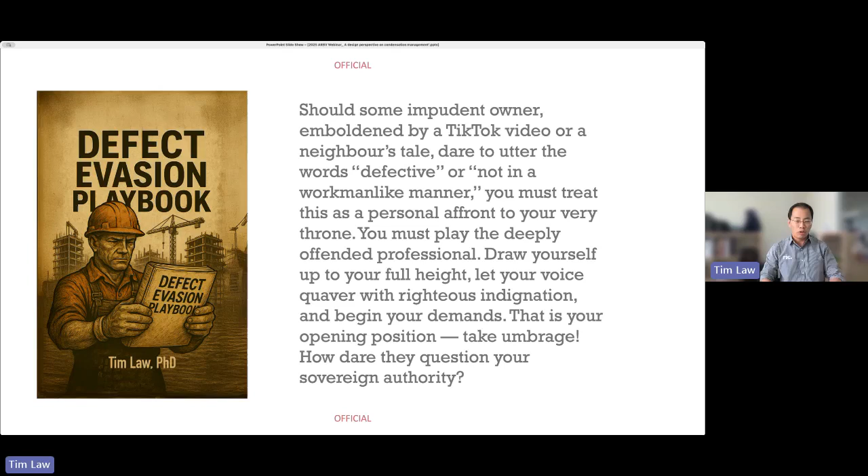You must play the deeply offended professional. Draw yourself up to your full height. Let your voice quiver with righteous indignation and begin your demands. That is your opening position. Take umbrage. How dare they question your sovereign authority?

Demand, demand, demand. It is the first step to a prosperous and untroubled reign. The strategic brilliance of demand is its immediate reversal of roles. The complainant arrives believing themselves the injured party, only to leave feeling they have somehow wronged you. They came seeking redress. They leave seeking forgiveness. Remember, dear Shonky, in the game, he who demands, commands.

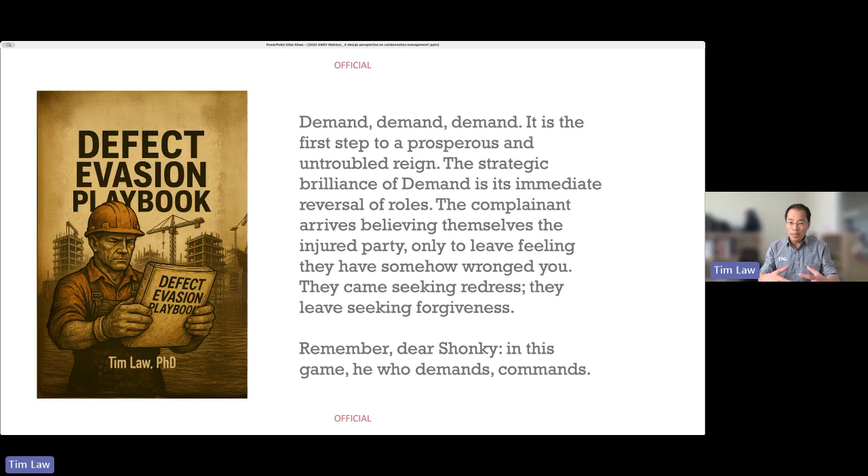I somehow find Dodgy's voice a very straightforward way of putting forward and framing the issues. So I'm going to channel that voice once again to address a few questions from let's say, a nephew that is an architect and asking him for advice around condensation. Can't the architect simply say that we have the problem even though we just simply design to the code?

Dodgy would answer, you architects love referencing the NCC. Maybe a bullet point on moisture management, a note about ventilation as required, and then a flourish of glass, ply, and hope. But here's the truth. The code's requirements for condensation are just enough to fend off an auditor, not enough to fend off physics.

Nearly every audit, ARBV report, and government research paper, and there have been many, says the same. Plans are invariably thin, documentation's perfunctory, and the attitude is 'She'll be right, mate.' We all know it. But now, so do the regulators. And worse, so do the judges.

To the question, Uncle Dodgy, so many other architects are under-documenting. It isn't just me. It's been an industry sport. Leave the plans vague, lean on standard practice, let the builder fill in the gaps, and if trouble comes, point the finger at everyone else. Builders, surveyors, or the poor sort who lived in the place and had the temerity to hang a towel indoors.

Sadly, those old moves aren't landing anymore. Why not? Because everyone in the know, tribunals, insurance investigators, even the VBA, now draws a straight, soggy line from under-documentation to defects. When condensation, mold, or rot turns up, the court won't ask about your signature vision. They'll ask what you did to manage foreseeable risks. Because by now, the risk is as well known as the price of smashed avocado in Fitzroy.

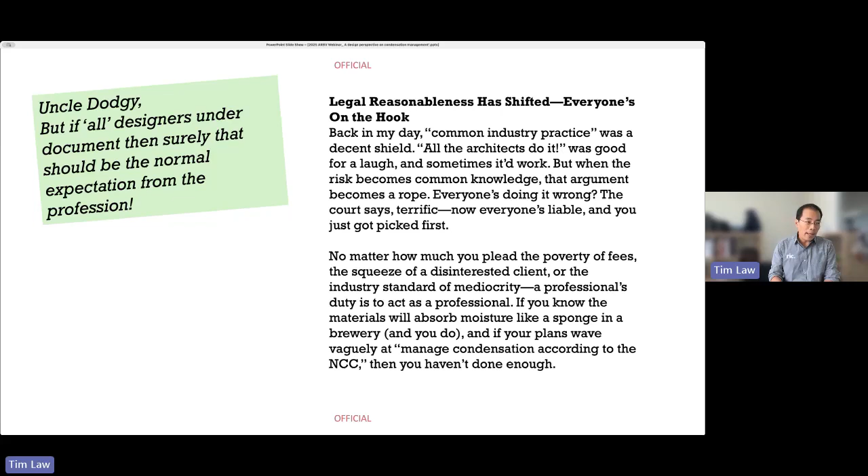Everyone's doing it wrong, the court says, terrific. Now everyone's liable, and you just got picked first. No matter how much you plead the poverty of fees, the squeeze of disinterested client, or the industry standard of mediocrity, a professional's duty is to act as a professional. If you know the materials will absorb moisture like a sponge in a brewery, and you do, and if your plans wave vaguely at manage condensation according to the NCC, then you haven't done enough.

Uncle Dodgy, good thing we're in Victoria and not New South Wales. Now let me pour vinegar in the wound. Over the border in New South Wales, they've wised up. The DBPA has made it law that architects must assess, document, and declare their designs comply with every requirement, sustainability and moisture. They register, they submit compliance declarations, and they are liable directly, not just in theory, but in cold hard cash, for economic loss caused by defective design or under-documented buildings. No hiding behind the builder, no industry practice, no 'but the plans were vague' excuses.

Expect those regulations to land in Victoria sooner rather than later. The days of plausible deniability, vague notes, and shifting responsibility are numbered. What's compliance in Sydney is about to become mandatory in Melbourne. With the BPC stepping up, not just as referee, but as a rule maker, if they haven't started, they soon will. Document boldly and decently, because what's enforceable up north will soon be enforceable here.

So to summarize, and this part is important because it comes up in the quiz, what is the way we can outflank condensation complaints before it even starts? First, warn.

Warn the client in writing about what is foreseeable: that mold food like radiata pine, engineered timber including LVL, particle board, plywood, OSB, etc., and especially paper-faced plasterboard—these things all hate condensation and moisture as much as a pensioner hates a cold call from the tax office.

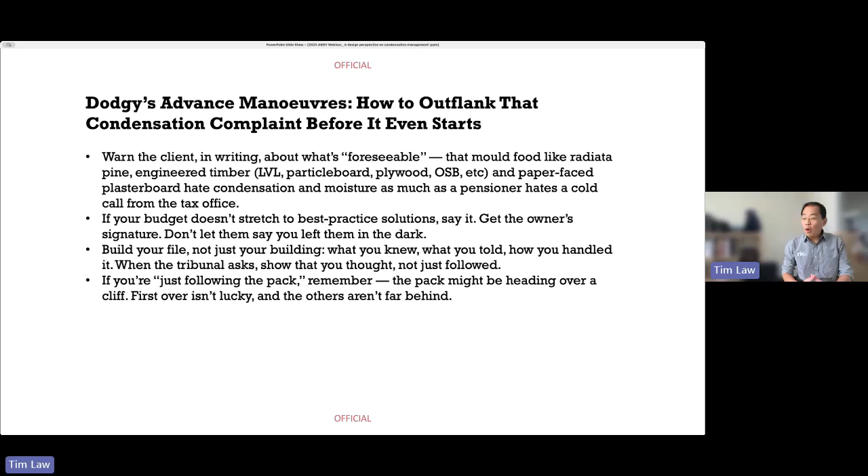I hope this has been helpful to you and that you learned some new things. I hope it hasn't been too late and you haven't already made some mistakes and committed to them.

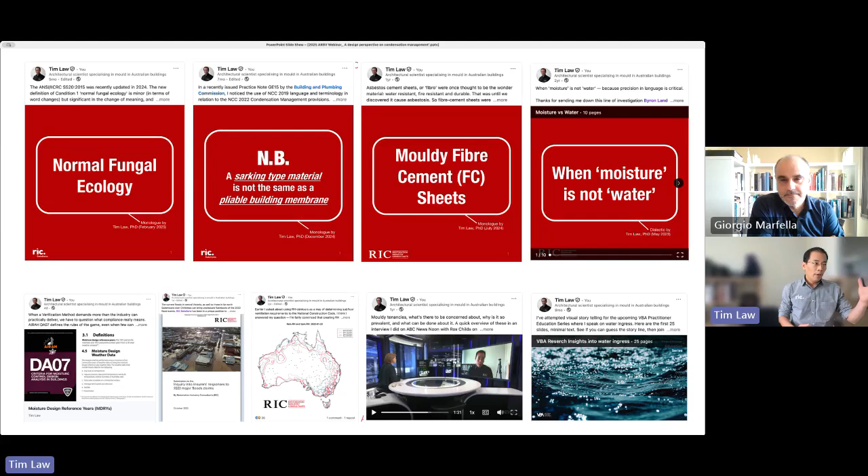Thank you, Tim. I think you're receiving a standing ovation at the very least this time.